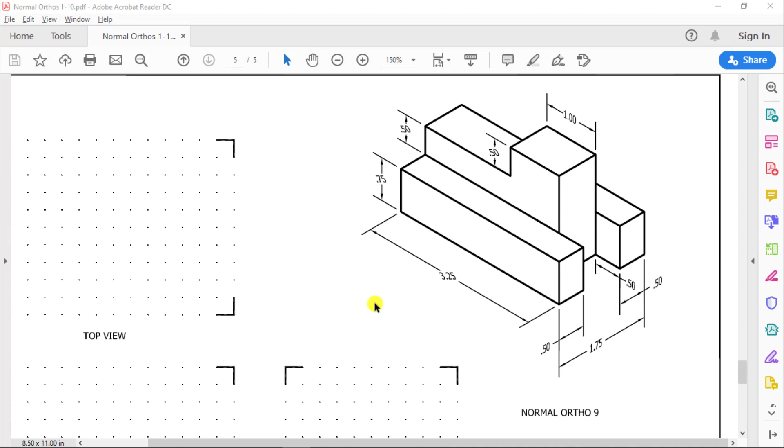Let's take a look at it and ask our standard questions. How would we describe the shape, and how many chunks could we tear it into? I would say we could tear it into 3 chunks. You've got a rectangle here, and kind of an L shape here. So that would describe it.

Does the part have symmetry? I would say absolutely it does, from front to back. This half is the same as this half. Left and right not the same, top and bottom not the same.

So let's look at this part. Where can we start? I could draw this L and then extrude this and then extrude that. But since I have the same feature on the front and the back, this is a great part to mirror, and I'll be looking to make sure you did a mirror for this part.

So we're going to start off drawing this L shape. We'll come back to Inventor and sketch on the front. In this case, I'm not going to project geometry because I don't have a symmetry to worry about in this direction.

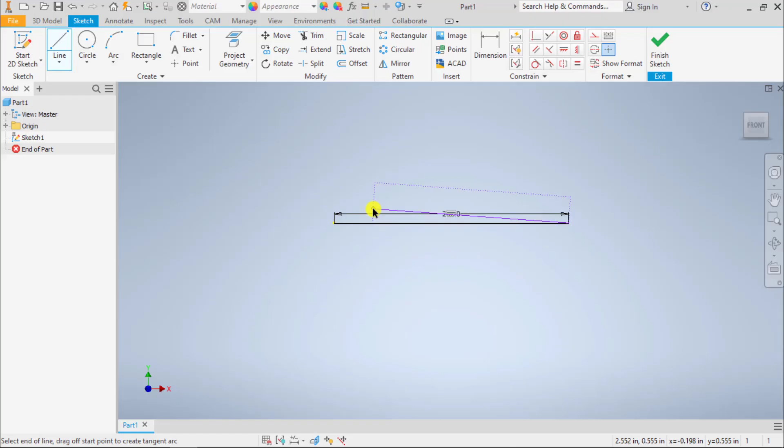Our first line is the full length minus a half inch. So instead of typing 2.75, I just typed 3.25 minus 0.5. Now we're going to come up full height, back an inch, down 0.5, and then auto project to the end and close our sketch.

We're going to extrude this. Now this is going to look tall, and that's fine. I believe that's 0.75, and we need to make this symmetric.

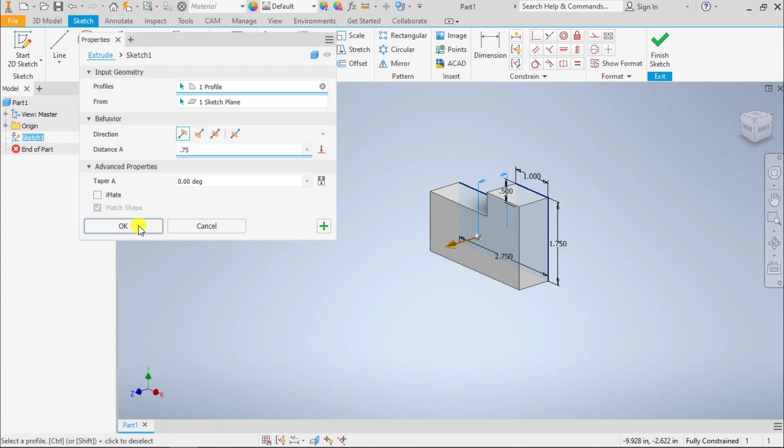For now, though, I'm going to show you what it's like if you don't leave it symmetric. So let's go back and double check that that is 0.75. Okay, great. So now we're going to draw a 0.75 by 3 and a quarter inch rectangle off the front of my L solid that I have.

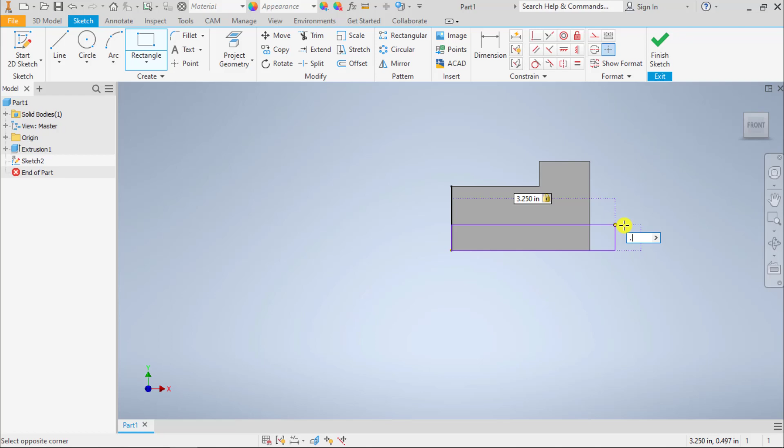So we're going to go rectangle, 3.25 by 0.75, double check that dimension. Yep, okay. And then we're going to extrude that.

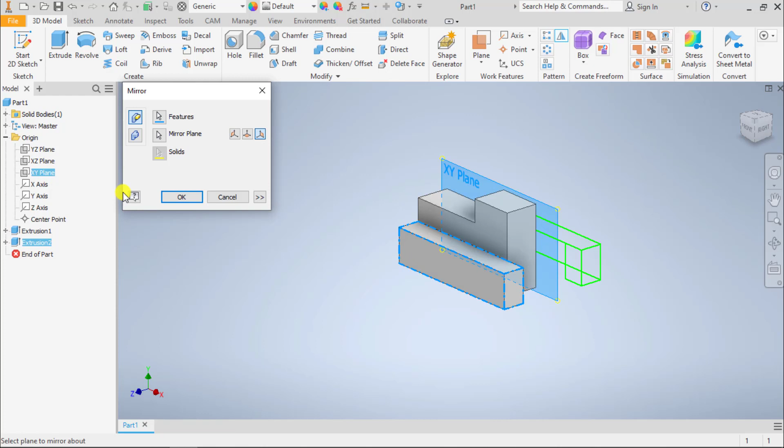0.5, perfect. Now, when I go to mirror this, because I didn't make my first L-shaped extrusion symmetric, my XY plane is not in the middle of my solid. So this is out too far.

This is an easy fix, so I don't expect you to do this. You can do it the right way by making this extrusion symmetric, but I'm going to show you how we can go back and change a part if you realize, oh, I messed that up. You do not have to go back. Very, very few times do you have to go back and actually delete a bunch of stuff to make it right. So let's do this real quick.

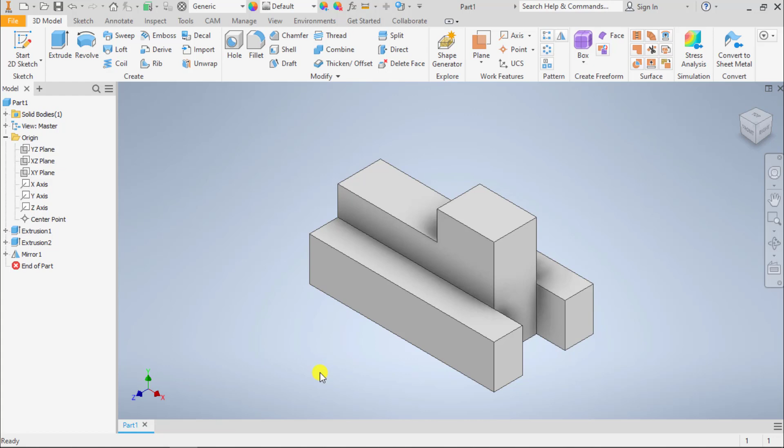Let's take extrusion 1, double click it, and change our extrusion to symmetric, hit OK, and boom, there our back rectangular prism is in the correct location. So just because you make a mistake doesn't mean you can't go back and try to fix it. In fact, I would do that before you delete a bunch of stuff and redo it. So thanks, and we'll see you in the next video.